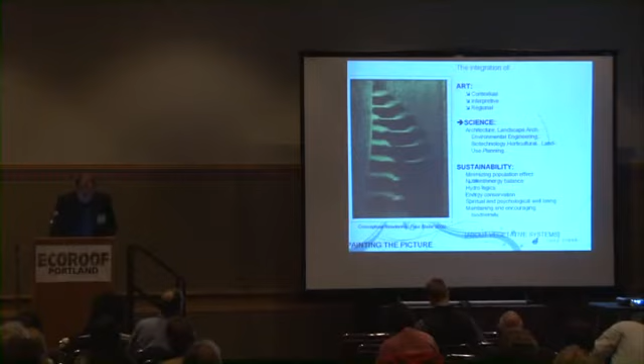I also want to somewhat describe the evolution of this design, this ecological design practice from my perspective in doing this for some 25 years now. And it is an integration of art and science and sustainability with that true emphasis on the philosophical connection we have and that spiritual connection we have to nature. And I'm thinking about where that green staircase will lead.

I had my start as an artist and ecologist in Big Sur, where Mickey Muenig came to me, and he had one of the first low-impact development projects on the coast where he said, we're not going to build roads, we're going to respect the local hydrology and that mantle of soil and earth, and built his bungalows and hotel units in the redwoods without cutting down a tree, and lifted them up off the ground plane.

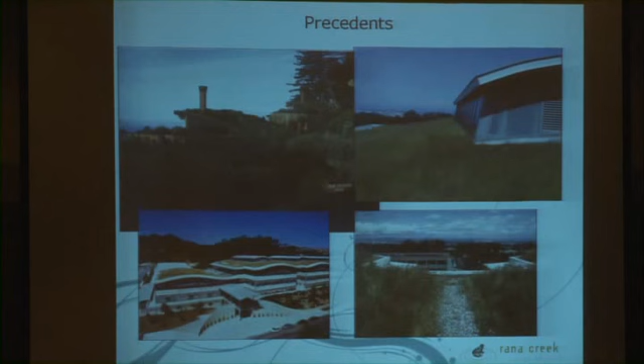And then on the coastal bluff, I was studying the coastal terrace prairie, some 250 species of vascular plants. And I was concerned, and I said, Mickey, you know, I'm worried about this. I've been studying the diversity and the rarity of coastal prairies. And Mickey looked at me and said, well, why don't we just lift that up and put it on top of the roof, and it'll be as a part of the site. And we did that, and that was 25 years ago.

And then sometime later, Bill McDonough came to me and said, Paul, I have a project, and I consider this a courageous project. Of course, at that time, the North American movement in terms of greening rooftops hadn't even caught on, and we didn't have those kind of metrics, and we didn't have a whole lot of information. Most of these rooftops were in the form of on-podium or plaza applications, and they hadn't fared too well, namely the Kaiser Center or the Union Station, both of which failed.

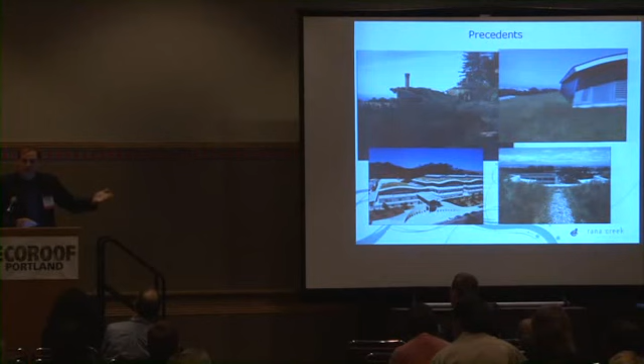And Bill said, I want to develop a landscape, or I want to bring that ground plane up on top of the roof. And I was doing restoration ecology on San Bruno Mountain and thinking about those McHargian type environmental factors of slope and aspect and orientation and wind speed and solar gain, and thinking about how that affects soils and other geophysical applications of the science of restoration ecology.

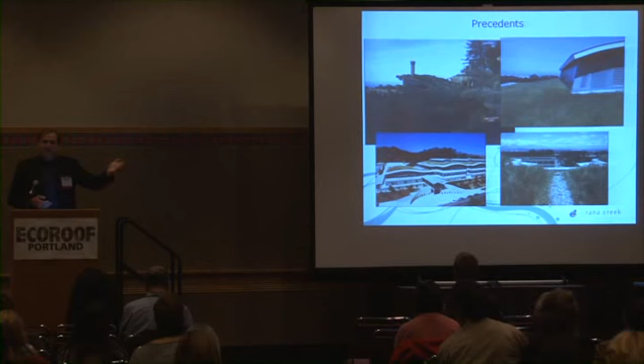And I wanted to model or mimic or simulate the composition and diversity and density of plant community structure. So I was thinking about restoration ecology on rooftops, and Bill's rooftops with those beautiful undulating swales gave me an opportunity to look at south-facing species and ephemeral annuals on the south slopes, and those cooler sides and swales with wet-loving and cool species.

And that was how we modeled this rooftop. And we also developed this idea of a bioswale some 3 stories above the ground plane. Now this is what's interesting.

We developed that bioswale with Juncus patens and Carex texensis and other wet-loving plants, and it would clean and polish and filter that toxic, poisonous, chemically volatile material out of the air, and purify and cleanse and adsorb water and moisture. And then we took that water and we took it right to the stormwater leader and right out to the storm drain. Well, we'd never considered doing that today.

And so in my discussion today, I want to share with you some of the ideas and the importance now that water has in terms of this integrative design process.

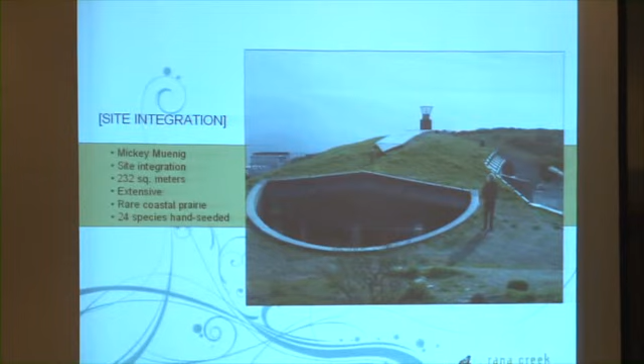And another theme that Mickey had mentored me about was site integration, this idea of respecting the natural contours and the hydrological features of a site and match lining the structure or the site or the roads or the conveyances to that natural topography. And I said, Mickey, I'm working on this criteria for architects in which I can help them understand ecological design principles of site applications for site integration, site and structure.

And I said, how do you do it? And he had that twinkle in his eye and he said, intuition. So it's not only about thinking here with our minds, but also thinking here with our hearts that we can achieve some of the greatest results.

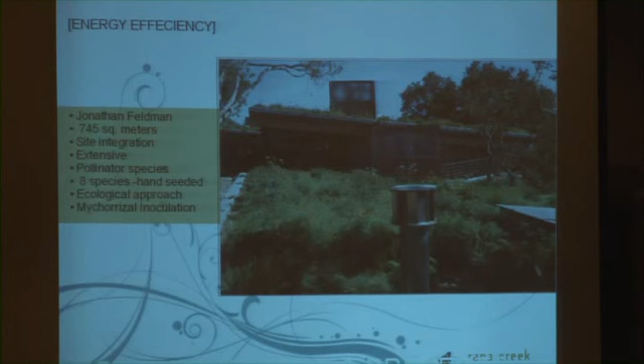And this little project that we had done for a house in the Santa Lucias, 175, 190 days without rainfall, extreme temperature variation there in the Carmel Valley and the Carmel Highlands. And we integrated this with passive ventilation, and at the base of that house is a constructed wetland with gray water. And there are vents that are hooked to a heat chimney on the hot side of the house.

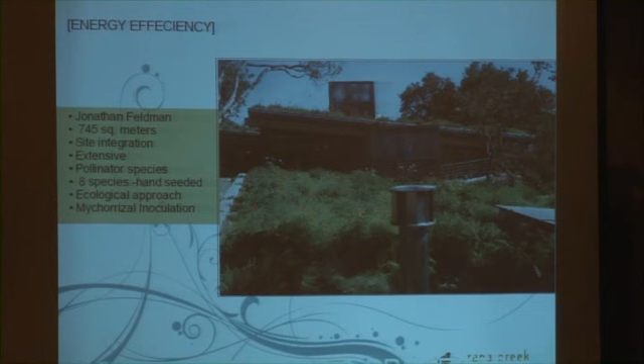And that pulls that cool air over the surface of the gray water wetland through the plenums in the floor plates and exhausts that air out the top. And then the rooftop is insulating, and they elected not to use any air conditioning here in this house. So it's been very successful from an energy conservation standpoint. And then we also selected and collected all the species for this project from the site.

And then this project really started my continuous debate and conflict and tussle with landscape architecture about amenity and adornment, that continual struggle between form and function. And I worked with Pete Walker, and Pete and I still have a spirited dialogue in regard to the application of landscape architecture and the ecological processes inherent.

And Pete said, Paul, I've got this parking structure outside of the Stanford Medical Center, and I want you to develop a plant that is 10 inches high, is evergreen, never needs to be maintained, you don't have to water it, and it looks visually like one solid continuous panel. I said, well, why don't you use AstroTurf?

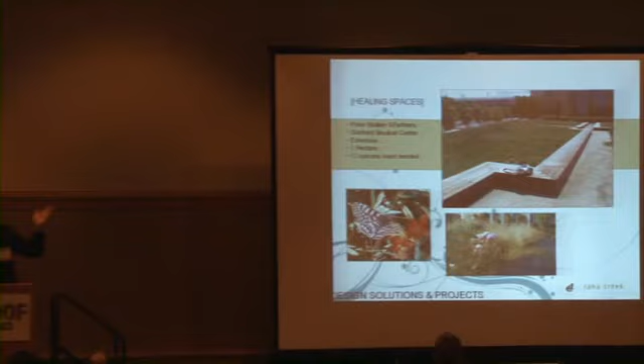Well, this began my understanding of this Harvard School of Design, in which we're looking at the site from an artistic standpoint, this texture and color and panel and the idea of palettes. Well, I paint with a palette and I assemble plants in cooperative assemblages.

And knowing that in ecological practice, where our systems have greater diversity, they have more stability. They're resilient to invasion by parasitic organisms and also to climatic fluctuations and change. So I went along with Pete's idea, and I put that green haze out there on the landscape.

And I also said, Pete, wouldn't it be interesting just to experiment and put a few little sprinkles of wildflowers for the patients that look down on this rooftop? And he said, okay. So I kind of affectionately call this the eco-hijack because I actually used 26 species of plants and about 60 pounds of seed and planted it with a suite of plants that were early and late pollinating plants for rare species of butterflies and insects.

And I just visited this site, and the other concept we got through here was this idea of decadence, dormancy, senescence, and decay. Oh my! You would think, with these ideas in sustainability, that, oh, we have brown roofs where they're dying. Well, that part of nature is also important.

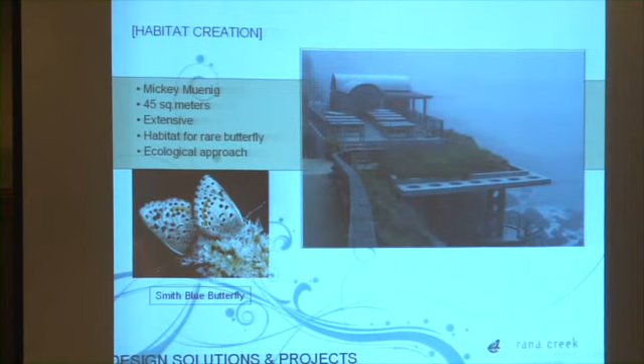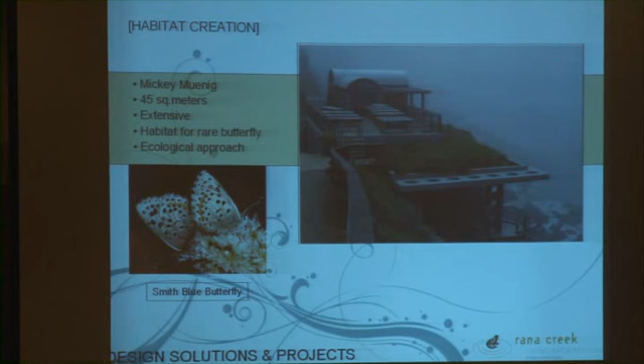And then this little project is really a fascinating project to me in that as a land use planner, I call that the dark side. Having done ecological restoration as part of a reconciliatory mitigation process, I was able to convince the U.S. Fish and Wildlife Service to use the rooftop as part of the mitigation for the site. Never been done. Typically when we mitigate off-site, we find intact habitat, or we find set aside, or we actually do ecological restoration to enhance habitat for, in this case, the Smith's blue butterfly, which is dependent in its larval state on the Eriogonum parvifolium, the cliff buckwheat.

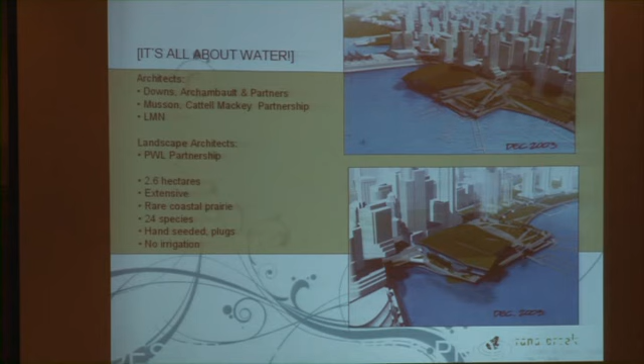And so we planted cliff buckwheat on the roof, and now you might think that my life as an ecologist is easy, but I have to sit in that hot tub with field glasses and monitor for those butterflies. And they get larger in scale, and I can't wait to get up every morning because of the industry and where it's going and the kinds of projects we're seeing.

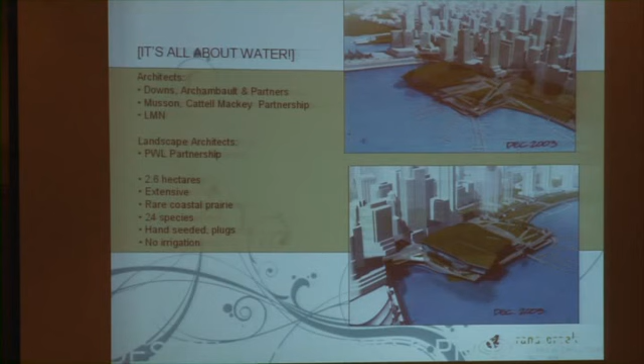The Vancouver Convention Center, I remember walking into the room, there were about 30 people, and there was the model, and I just said, this project is all about water. And truly, we developed a wonderful project here with LMN and PWL Partnership, landscape architects, and we planted some 24 species of grassland ecology and forbs and pollinating species, and allowed for seasonality and high levels of diversity.

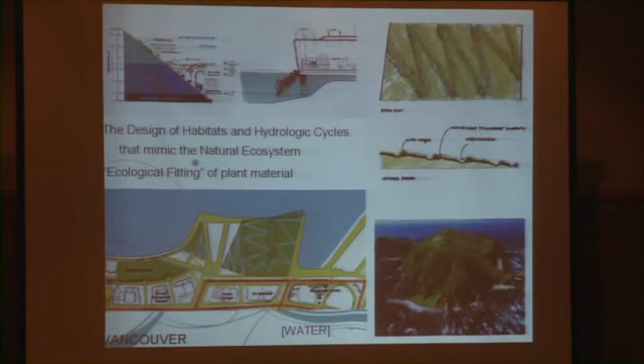And those key lines were engineered by slope and aspect and roof orientation to look at the runoff coefficients in those particular segments, and they are sized only to handle that amount of water as the folds went down the roof. And interestingly enough, function informed form, and the landscape architects took that idea and they seeded part of those angles and they planted other parts, and it's created visually a very interesting functioning landscape. And I was just there, and it's really a pleasure to go back and see these projects.

And I went on a tour and I looked in the basement, and part of our big idea was integration of water. Stormwater we lost early on with the sustainable ideas, but wastewater we hung on to. And there are biodigesters in the basement of the convention center, and the day I was there were 11,000 visitors watering the roof, and all the wastewater is filtered, and the digesters digest the solids, and that goes into processing and storage in two 20,000-gallon tanks, and that irrigates the roof throughout the entire summer. And it keeps it lush and green and vibrant and flowering.

There's bees up there. But it also is reused to reflush toilets. Well, I learned something there that made me happy. All of the energy they're saving through evapotranspiration and cooling on the rooftop has now paid for the entire blackwater system and its operations, maintenance, and upkeep. So it's time to celebrate, because we're taking these integrated sustainable measures and we're getting an ROI. We're actually getting some return on our investment, and that's when the incentive is there. So a great project, good people.

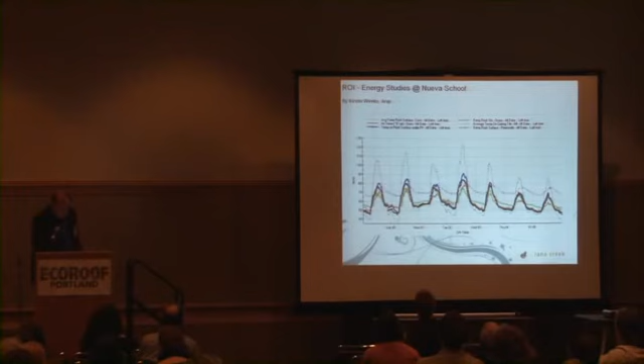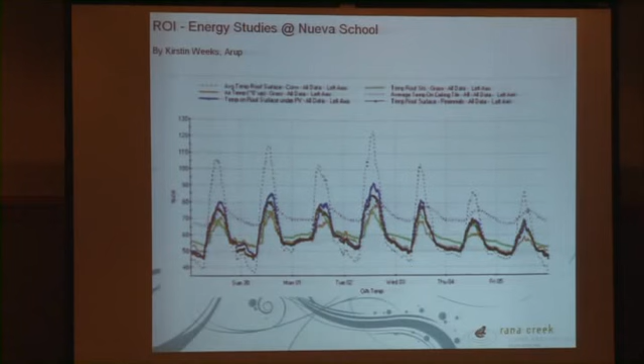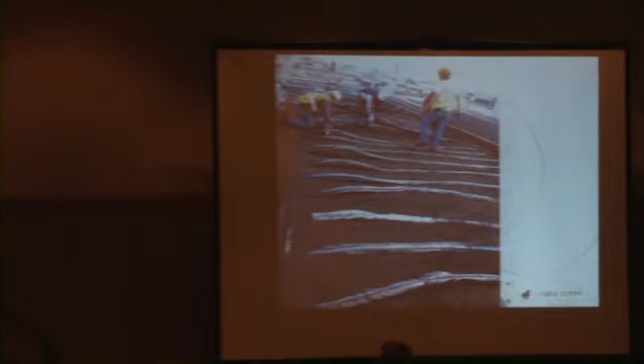And then a local project, this was just taken 2 days ago, on the Drew School, and that's our crew installing this. And this is an interesting project and somewhat of another one of those tussles that we get into, and that has a Patrick Blanc wall. And I had said, well, why don't we take the parapets and the rooftop and just blow out the parapet and not have any area drains on the roof, and like Scarpa would, we'll run all the water right off the roof and over the wall and into a stormwater flow-through planter wetland system at the base of Patrick's wall, into a tank in the sidewalk, and then closed loop prior to overflowing to the storm drain.

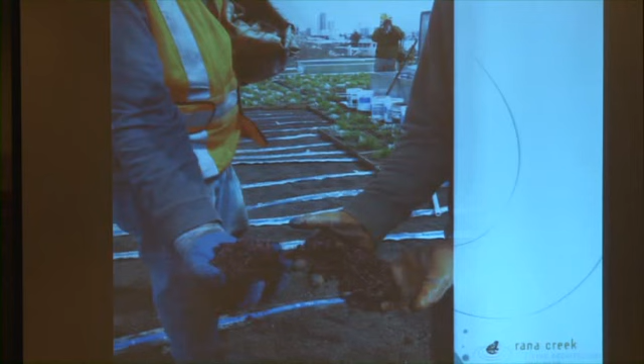Now, these walls that Patrick makes are beautiful, but they also are hydroponic, and that's an example of the rooftop. But I wanted to show you also, and I'll get into this story a little more, we're encouraging greater levels of organic material in our soils, and also this was one of the first specifications where we actually put earthworms up on top of the roof. But Patrick's walls are absolutely gorgeous. He's a horticultural genius and a wonderful artist. However, these are hydroponic systems. They're based on felt. They're stapled up to a Hardie board, drip tube with a fertigator with nitrates and phosphates.

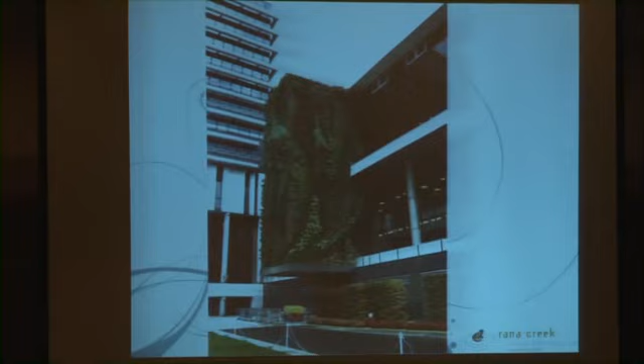And I said to the client, let's think out of the box. Let's take the water off the roof, blow out the parapets, and then take it and collect it. And we got a grant to do that, so that we aren't taking some 4,000 gallons of water a day full of nitrates and phosphates and dumping it into our storm drains. Great. PUC loved it, gave us a grant. I found out after I had signed my contracts to build this that they VE'd out all the recirculation and the storm water. So it was really a big disappointment.

And then I'm thinking, well, the only thing green about this project is Patrick's hair. And I'm getting a little testy, which I sometimes do. I'm starting to beat my chest, and I haven't gotten through it yet, but that's a picture of it.

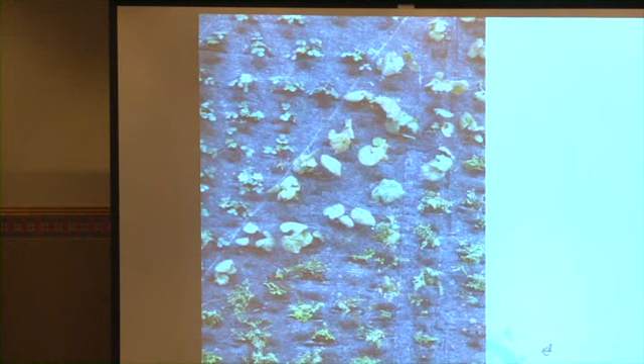Unless these have a recirculation system or some kind of capture and reuse, I wouldn't recommend them. And I'm a little concerned about the viability long term. Here's the growth just after a couple of weeks. And of course, what I call this is a rug on a drug. And so it's hydroponic and nitrates and phosphates. And when you start to add it up, these are some of the projects that Rana Creek has been involved with around our Bay Area.

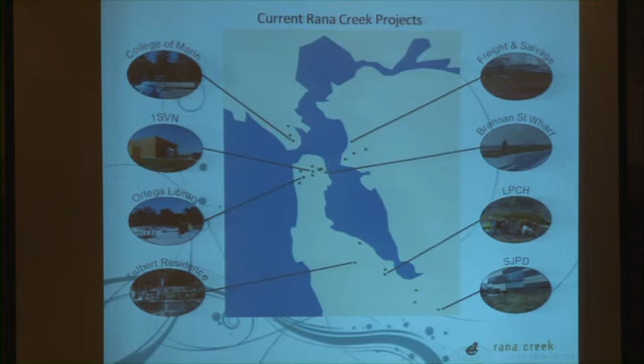We're really starting to get the pattern and connection. I know this pales in comparison to the density that I saw on your map this morning of Portland. Congratulations. But these are just Rana Creek's projects, but I've started to add it up and keep score, and I thought, well, how much rainwater are we actually starting to retain during those storm events, and just our projects is 28 million gallons a year.

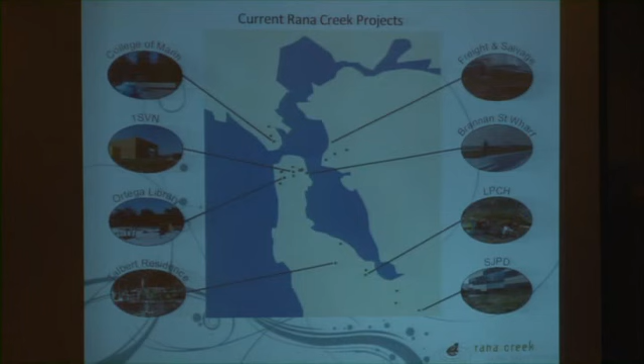And the San Francisco's One South Van Ness project on an old bank building, this is a retrofit, recycled all the insulation and all the old pavers and every bit of the ballast gravel. And we created a habitat there for painted ladies. We took the air conditioning ducts, which are as long as this room and about 6 to 8 feet tall, and did this. We painted the mother painted lady on that structure and then planted the whole surface for painted ladies, and it's a field of dreams. They came. It's a beautiful thing.

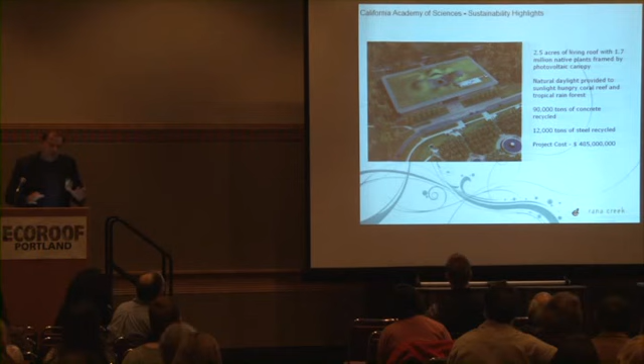But this was our first example of where that penthouse, we captured all the rainwater and stored it on the roof, and then we're gravity feeding that water to irrigate the roof. So a lot of good things happening, and the California Academy of Sciences is another example of when everything fits. 2.5 acre living roof, LEED platinum structure, just a brilliant design team.

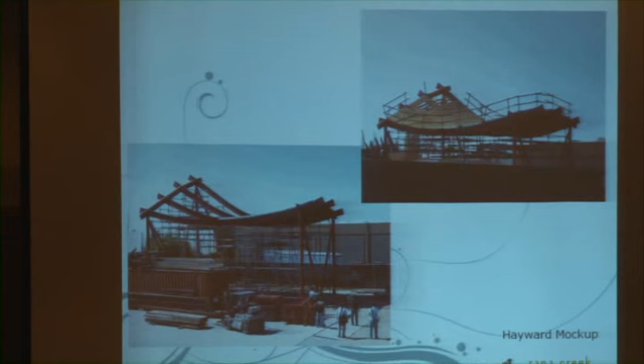And one of the first things we did, and I've often recommended, we did this at the Vancouver and we did it on the Gap, is we build these mock-ups, because oftentimes people ask me to do things that haven't been done before. In this case, they asked me to retain 6 inches of soil on a curvilinear slip plane that's 70 degrees. And I said, yeah, of course I'll do that.

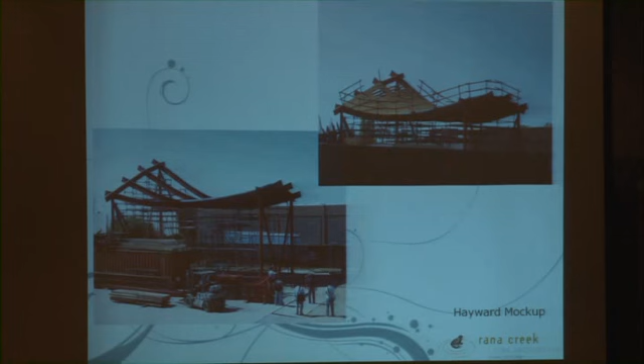And I remember the design team, they got me over at a restaurant and gave me a couple glasses of wine and then started to interview me about whether or not I thought we had the stability of this rooftop figured out. And I was doodling and sketching, and I looked up and I was, we wouldn't have any problems. No, we got this figured out, and this is how we're going to do it. And I look up and they're video recording me. So sometimes you got to have somebody with the target on his back.

But when this started to get real, if you follow the trajectory of that slope, the top of the dome is somewhere up here above the projector screen. That's giving you the idea of scale and mass. And about this time, I started to lay awake at night wondering what I got into. But also you think about how these loads telegraph through the structure, and we put all our drainage systems in a grid pattern over top those beams.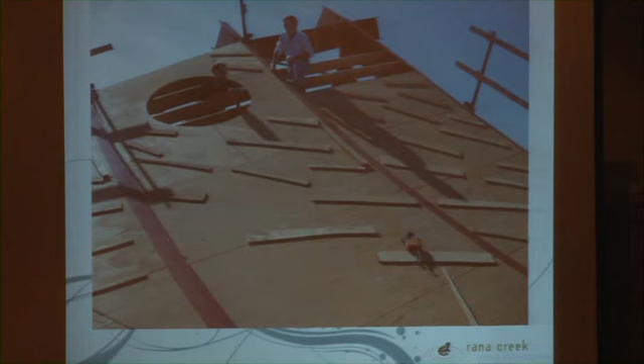And I remember, here's this other tussle story between the form and the function. I had developed this beautiful lacy keyline design on top of the roof, minimalist, just what we needed. And Renzo's team came back with this grid over and atop the domes. And it was because it would mimic the look of the streets of San Francisco as they go over the hills, and I thought, well, how ridiculous.

But as it turned out, that was a really good idea because it gave us an opportunity to randomly stratify the whole roof in 97 cells. And now we have edge effect controlled, and we can do experiments. And really, actually, as Renzo said, Paul, we're just going to provide a canvas that the Academy can paint on.

And this is just part of that, and we began to learn other things when LEED would come into play. Renzo's team and their sense of aesthetic, they like this polished rock that's picked up by Mexican children in Baja off the beach. And so I said, well, why don't we use this old cobbled-up mine waste stuff that's just 100 miles north. And it was a good process because LEED kept us honest and we actually made the right choice.

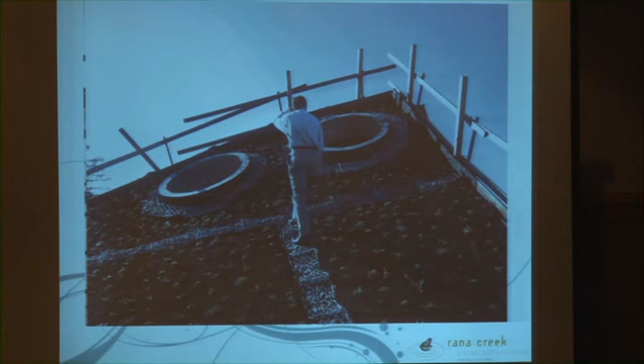And then I was trying to figure out how to retain soil around those skylights, and came up with these gabions and channels, in which case you can imagine over a 5-year period you're losing infiltration, and during big rain events, that sheet flow, you want it to get down to your drain layer and off the roof. Erosion happening, from the bottom of a slope and cutting up.

And I remember Renzo saying, well, Paul, you tell an interesting story, but it has to be beautiful. And I didn't like this very well, so I then came up with what I called the Victoria's Secret solution, the underwire bra. And that retained all the soil there without having those big clunky gabions in the channels.

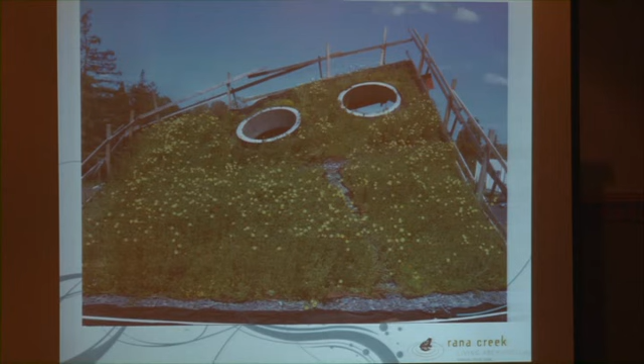So we then planted this with our 4 species of perennials and some 6 species of annuals, targeting pollinating periods throughout the year and biodiversity, and began to hone in on PLS seeding rates, pure live seed, in order to get the right composition. But you know, when we started to implement, we also did another mock-up there in the lower corner, but you can start to see the complexity and the scale and the size of the transitions.

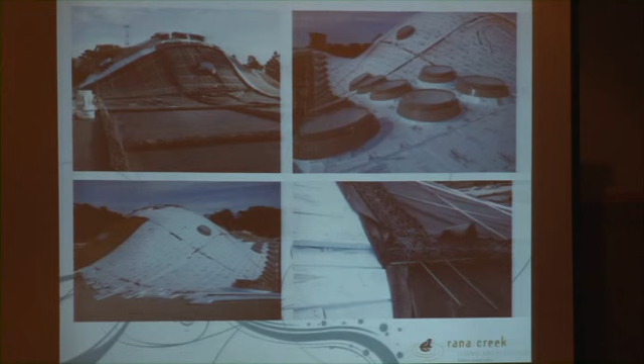And here's another way in which we retain that soil: there's 2 layers of insulation, and the top layer is simply separated, and that gabion basket is sitting on the bottom layer, and there's a lock channel, and then rebar through that, tied by these fabric or fiberglass poly straps and anchored to the other side of the dome. So essentially the weight is cantilevered. If one of those cells were to move, then it would have to drag the weight of the other side over the top. And that was part of the solution.

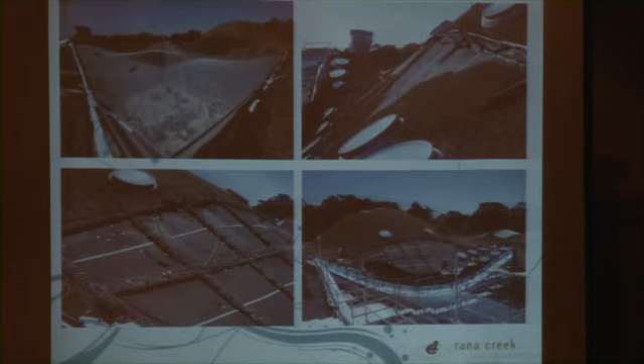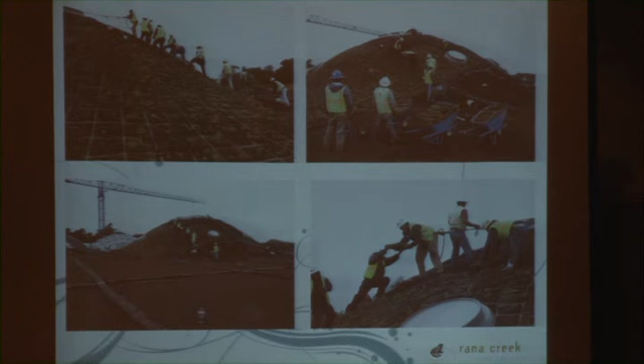And then we began to divide those cells into smaller segments, but I think now you can get an appreciation of the slope and aspect and orientation, and sometimes it rains, you know, 6 to 8 inches overnight or in a 2-day storm event. We haven't had any erosion or problems, and it's fully vegetated. And this was a great effort by Jensen Landscape and how we tiled up these trays.

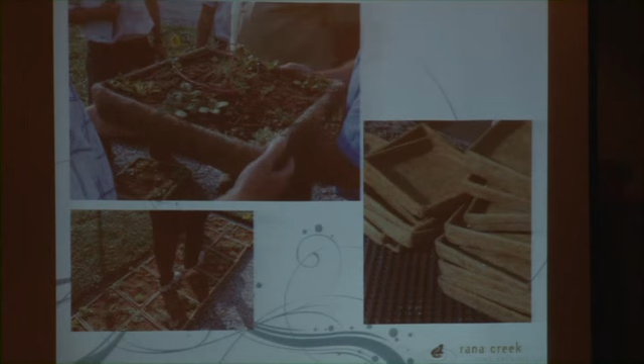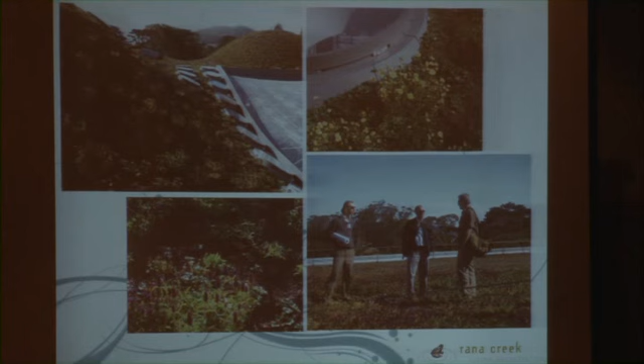And it was really a successful method of getting soil and plants pre-grown on top of the roof in an economical way, and it turned out really nice in that the trays did what they were supposed to do. They biodegraded and left behind some carbon and organic matter, but now it's seamless and you don't see them anymore, and the flowers have emerged, and that's just the way in which we planted. But the whole roof evolved, and now we've applied that technology elsewhere.

And so where from here? Those are built examples, but now bringing you fast forward into the future to large-scale design opportunities where we're pushing that envelope and bubble on integrated water management and design as part of the structure. And we're reaching for these objectives, in that we're not going to use potable water for irrigation. And that's particularly important in the Bay Area, where we have some estimates of 60% increase in water costs over the next 5 years. And we're not going to use potable water for non-potable applications.

Why are we taking drinking water and using it to flush our toilets? I'll never know, especially in the deserts. And no groundwater and stormwater discharge. I think we're there. We're getting there through regulation, the Clean Water Act, and we're getting there through LEED with site credits. Treat wastewater and stormwater as part of an integrated system and as part of structure.

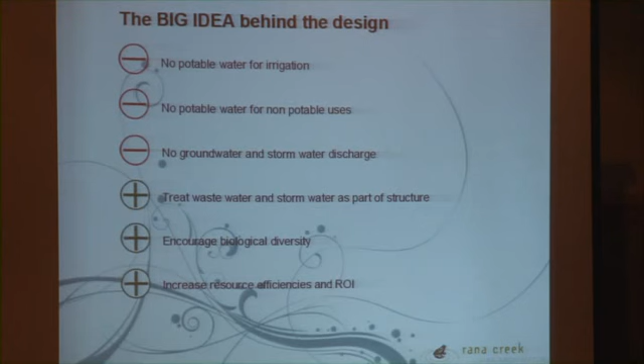That's like science fiction. You know, a few projects we're getting there, and architects and clients look at us like we're sometimes loonies, but that's okay. We are. And encourage biodiversity. And finally, this most important topic: never tell a developer you'll save the world. Tell him you'll increase his bottom line and save the world, and we're getting there.

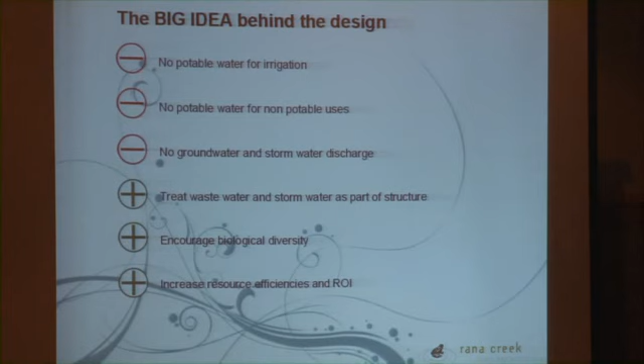We've got now a gray water calculator. We just did a project for Ford on reuse, 250 homes, 45 of those homes providing all the water for all the irrigation they can possibly use in landscapes, and it pays for itself in 3 years. So that's where we've got to get to.

And when we start stacking those applications together, what the permaculturists called stacking functions, or this idea of multi-functionality, I want to highlight some of those things in these 4 projects today and give you an indication of the trends and issues, resilience and integrated project delivery in water, choosing by advantage.

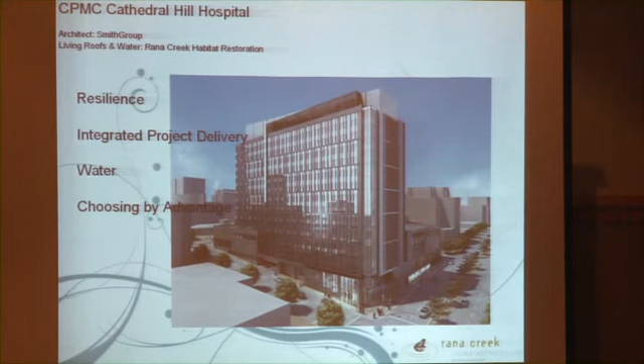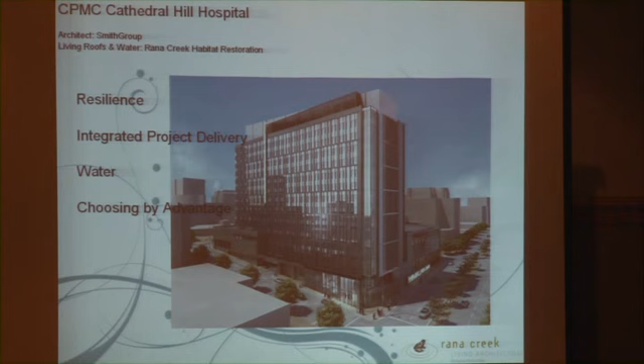This is a $1.7 billion hospital built at the location of the Jack Tar Hotel in Geary and Franklin, a really urban place. This was where Francis Ford Coppola wrote one of his first screenplays called The Conversation, for all of you trivia buffs out there. But we also went through this integrated project delivery, and we developed 7 rooftop gardens that are fed by gravity and that end up in a collection basin or a tank below the structure.

And we then began to think about this big gap we have. We have all this demand in the summer for water, and then we have 0 storm water. So we need to fill that gap with waste streams. And I said, how much water is the cooling tower blowing off? And it was 12 million gallons. So great, give it all to me. I'll take it all. We'll commingle it with our storm water, and we'll use that all throughout the summer. And it just got us to about 50% potable water usage that we could decrease. And then we increased our real estate and tank size, and we got to 100%.

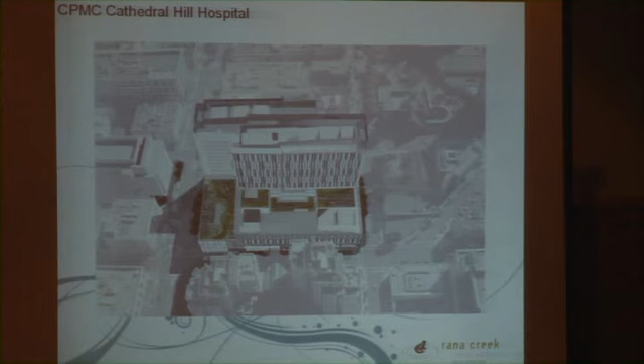But that's kind of the idea there for the hospital, and looking down on this side of the structure, there's the connection, and some 5,000 visitor patients will have access either visually or physically to these rooftops. And these are modeled after ephemeral ecologies.

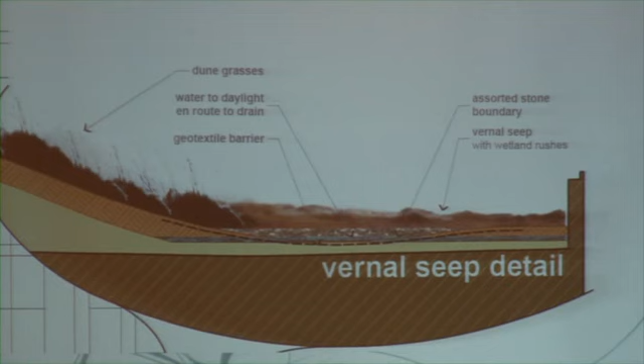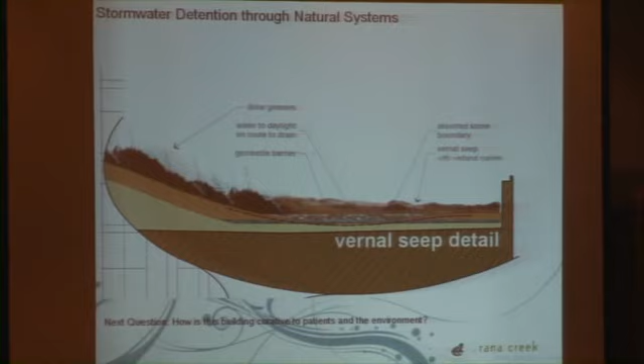I first saw this done on cobble substrate in Switzerland and applied this to our western landscape ecologies and actually changed the composition and the basins with higher levels of particulates and finer particulates and clay, dolomite, so that we can actually retain water and spill that water and get that mound, intermound, basin effect of shrinking and growing water bodies, so that we can encourage these kinds of species. The butterflies require that kind of a mud surface for triggering reproduction in the springtime.

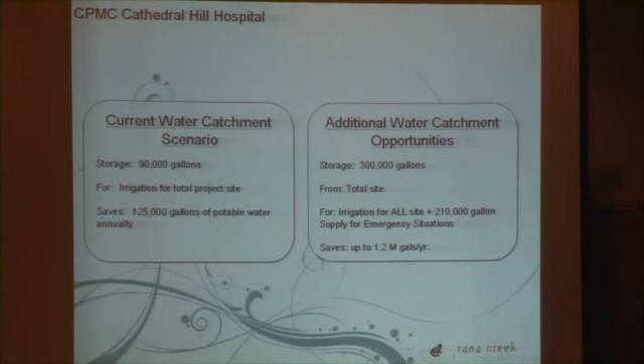And the water story is interesting in that we've, by advantage, chosen this additional water catchment with all of the storm water and all of the cooling tower water. It's going to save about 1.2 million gallons a year. And it's really about resiliency, about a 3 to 5 day water security for the hospital, thinking that the Bay Area, San Francisco's water supply is 187 miles in a single pipe to the Hetch Hetchy Reservoir in earthquake country.

That's the other thing. We always talk about the warm, fuzzy stuff, but we really need to take the gloves off and think about survivability in our cities in times of catastrophic events, and I think we're beginning to see the acceleration of those events globally.

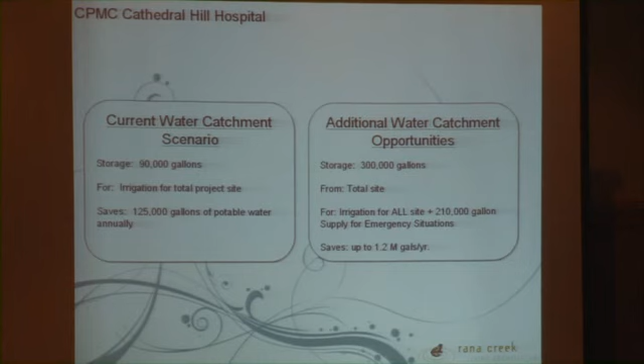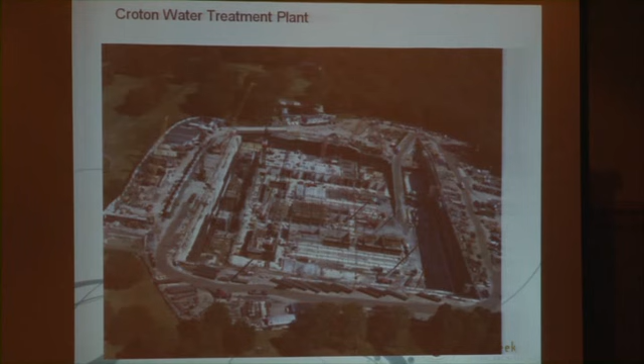And here's another interesting project that is a bigger scale, just to kind of tweak your imagination. 9 acres on deck, and this is for the Croton water treatment plant. It delivers 50% of the drinking water of Manhattan, and it's submerged 3.5 stories deep. And when they had excavated, they found 4 artesian wells that are producing about 50 gallons a minute, and it has chromium in the water, which is a hazard.

And so we decided to take that back up in this crescent-shaped constructed wetland, and all the entrained water that's going through the golf course and the driving range goes back into the wetland. All the storm water goes into the wetland, and all this pumped water out of the subfloor goes back into the wetland.

And while these concepts at this elevation appear simplistic, the brain damage we went through over spreadsheets on residency time and calculating the square area and the variance in flow and source models to come up with the size and the type and typology of the wetlands was challenging.

And zero runoff, so all of this water then is entrained and reused. Now you'd think that would be a challenge, but the biggest challenge when I talked to the golf course, now remember, the homeland security issue, people flying over this are going to see not the water supply of New York City, but they're going to see just a driving range and a golf course that's seamlessly integrated into the golf course of Van Cortlandt Park.

And then any of the public that are in the park and doing their golf and recreating, they can't get onto the roof to the plenums because of this moat. But that's the big idea there, and again, that biggest challenge was I got the list of the cultural practices from the golf club, and they had 26 different types of chemical, inorganic herbicides and pesticides that they use as a part of the management of the golf course.

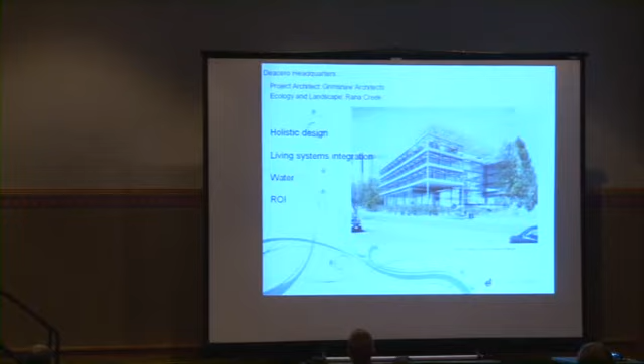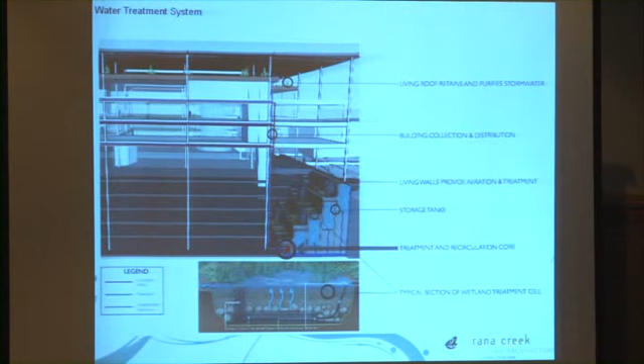And it's funny the kind of things that occur in the design process. And this project I absolutely am thrilled with. And I could talk about projects from now until midnight because it's so fun to be engaged with great architects. And this was really about holistic design. We had no barriers in terms of water. And so we took storm water off the roof and gravity fed that into the atrium. This is being built now. All these projects are being built.

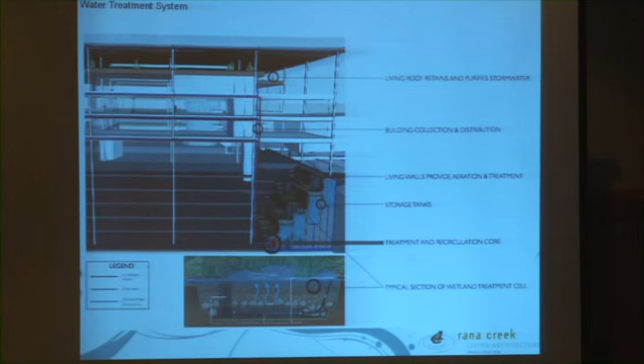And again, we're thinking about, there's a car culture, Monterrey, Mexico, DeAcero headquarters. Everybody has their own car. Everybody drives their own car. 5,000 cars come to work. So they developed this big parking structure below grade, and I said, well, why don't we put the constructed wetlands to where we can use passive ventilation coming off the rooftop through the atrium, which is, you know, a big

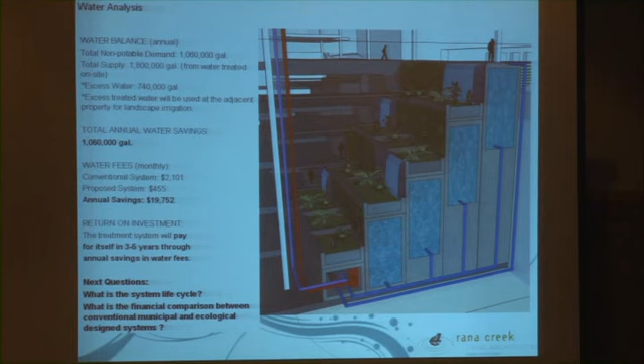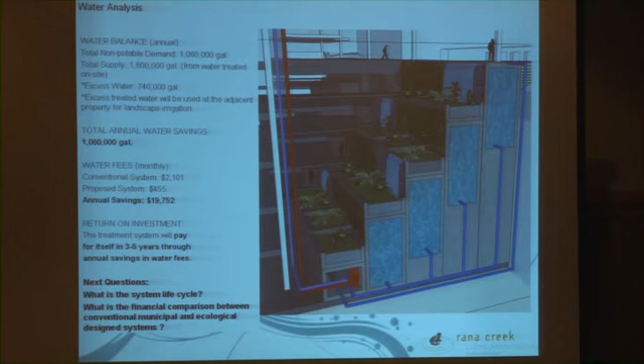But with the combination of the black water treatment, the gray water treatment, and the storm water, we were able to do some really cool things. We have 740,000 gallons of water a year that we can't even use. That's being exported off the site and given to the city to grow park trees along the causeway because they have no water. And it saved us about 1 million gallons. And I know these are small numbers, but they're important numbers. And it saved about $20,000 a year. And it pays for itself in 3 to 5. So again, we're starting to get there.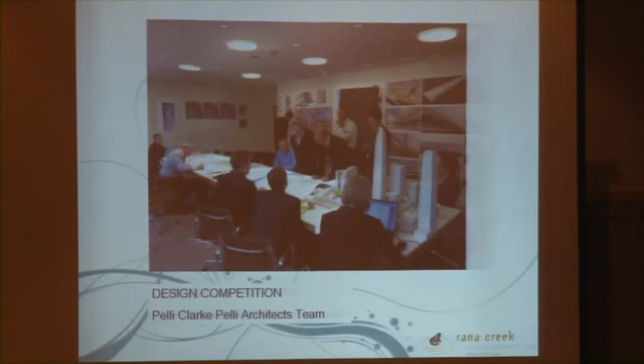And I'll talk about one more project in design that is really fascinating, a 6.5 acre park downtown San Francisco. And this is really about policy shift and change in that the first design charrette, that's me in the background not paying attention, we were thinking about the big ideas for the project, and that tower was in the scheme at the time, and I was thinking, well, what's the capacity of the park as a metabolic organism that cleans and physically, mechanically, and biologically processes water and waste?

And then I drew this little cartoon about the water processing, thinking that we could take that water and process it through the living walls. And it's interesting how this is what Renzo taught me about these little abstractions and cartoons. They're so informative that we could take water and bring it through the living walls and bring air with that water and kind of bubble it up through the constructed wetlands.

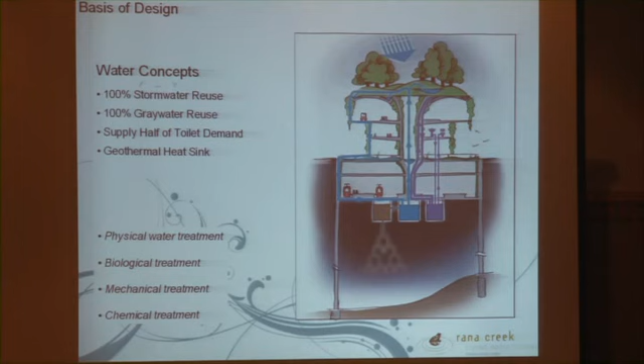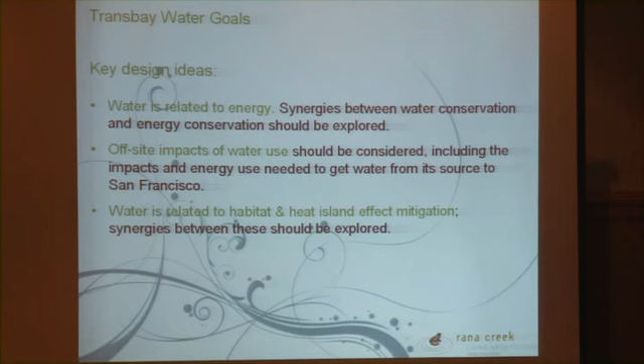Well, we're getting there. The design ideas are linking water to energy, and we're also looking at the off-site impacts, and so now we're bringing stormwater from all around the building. LEED looks at the site and at the structure internally. We kind of said, okay, well, what's out of the box? So can we take water, stormwater and wastewater for other locations and treat it? And then it's also important for habitat, and that's been our designs.

And working with Pete, he's come up with a somewhat complex scheme with a lot of program, and I'm glad that he's there because he really fought the good fight with keeping this park a park. You can imagine the municipalities saying, well, if I open a coffee shop, we'll have revenue. And, oh, I want a basketball court and yoga pavilion and amphitheater and 6.5 acres later, we've got a strip of lawn and maybe a couple of flowers.

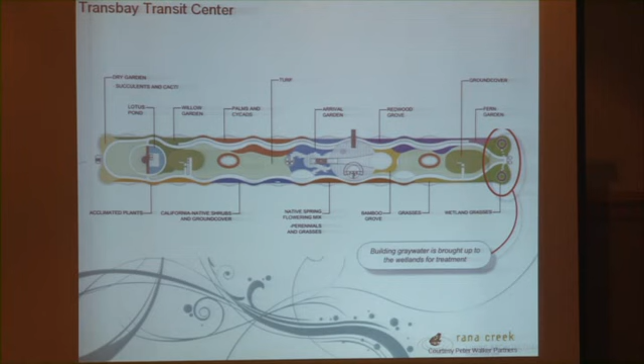That's not the case. We really achieved great things in that first time in North America, we put this large-scale gray water processing on top of the structure. So all of this water is featured and it's flushing the toilets and it's gray water cells. The water's entrained and it's subsurface, which meets our code. It was a real challenge with code, and this is the vision, big basket columns and 6 feet of growing media.

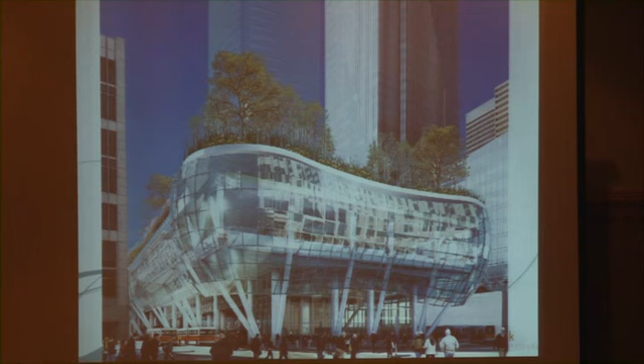So mature, I can envision that, that's Pete's vision on the green side and Rana Creek's vision on the brown side. But notice the importance we put on certain occupants, not the crack dealer, but the importance on certain species is a part of the vision, and that's the constructed wetland for gray water. And I can see we're going to have canopy forest because of 6 feet of growing media, but that's between 2 decks, and there's a lateral cell that's quite extensive for lateral root growth and development. And we've modeled the life cycle weight of this, and those basket columns are going to hold it up.

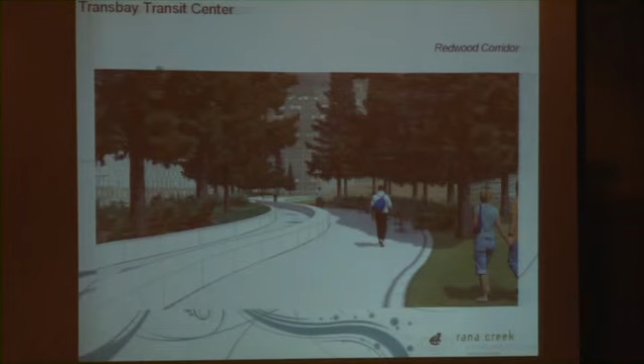And these are the species right downtown. I was seen lately running downtown San Francisco chasing 2 dragonflies to see where they went. And sure enough, they went right down the storm grate and found a little breeding ground. And then the scorecard looks like this. Our water savings is equal to about 9.5 million gallons, or what is that, 115 residential homes. And then the numbers are starting to look pretty good, but on a structure like this, it's pretty tough.

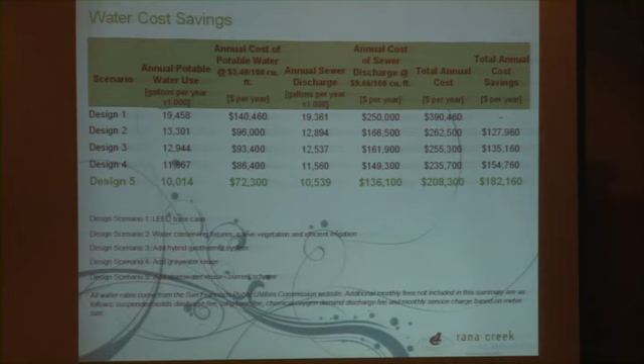Policy achievements, we actually got a variance with the PUC, the building department, and the State Water Resources Board on the gray water. And that was not necessarily the only part of the green features. So this is an aggressive, ambitious project with natural daylighting and semi-conditioned space, and really a great opportunity to be a part of this.

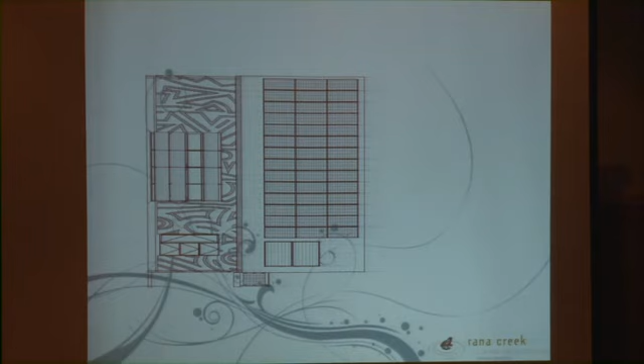But that's the garage on this interesting project, and it's the test for a living wall system, an art system that's in Three Rivers, which is at the base of the Sequoias, 8-inch rainfall, lots of 120-degree days, and that's the kind of growth we've had with 15 different species of plants. It's soil-based, and I want to go back here because I've lost one of the images.

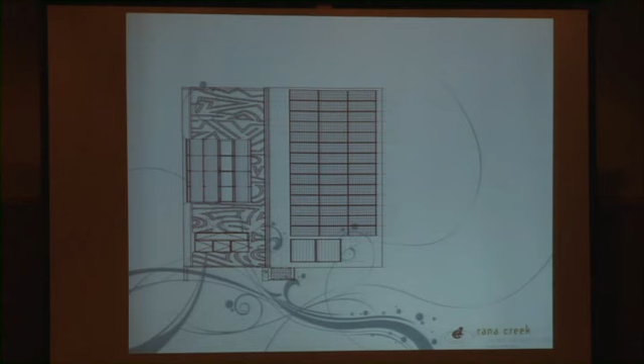I wanted to say that it's an estate home, but it's the laundry for all the different homes, and so we're taking all the laundry gray water and integrating that with the stormwater, and zero potable water is used in a fairly desert, arid climate for this living wall. It is soil-based, and it's based on the use of reclaimed water, and that was just our first little mock-up. And this idea of art, we can take this abstraction and think about its application to landscape and design.

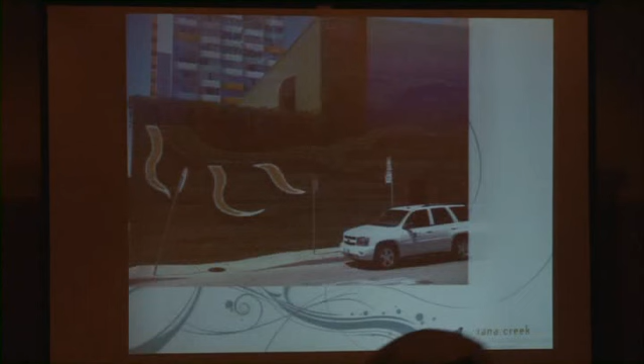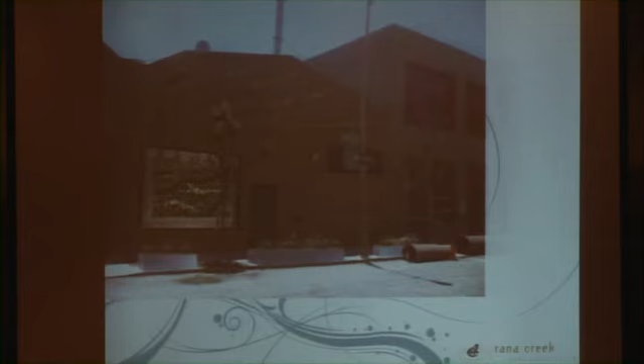I think that's where the spirit of our work really comes from, is this integration of art and ecology, engineering. And this piece I've just been commissioned to do really incorporates metal sculpture and color. It's on a gallery, and then thinking about, well, why not just frame the pictures and start putting living walls in pictures? And the last scheme looks something like this, focusing on ecology and different species.

So that's kind of where we are. I feel like we've just taken off. It's an exciting time for us all. We've got a great history of working together throughout the world, great networks of people, good organization, terrific products. Policy is moving forward, and I couldn't be more optimistic.

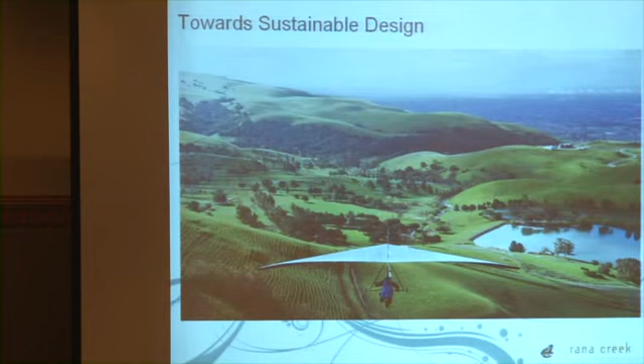If there's any that need to be asked. Out there? Does anyone have a question for Paul? No? Yeah.

I like the coconut boxes that you had on that rooftop. Are those available for the general public? I'll tell you what, they are available, and Tremco is a large roofing manufacturing company, and they just bought that patent, and I'm working with them to do the BioTray 2, which is made out of hemp. And so hang on, this coconut is a great idea, and it supports some of the forest farmers in the world. It's organic coconut, but hang on tight because we're going to introduce some organic, local materials. But you can call me or Tremco, and we can give you information about it.

And the last and final question for me is, at the very beginning of this lecture, you mentioned a Kaiser building and a Union Station that failed. Could you very briefly say why it failed and how we as homeowners or whoever doing Ecoroof can prevent the same mistake? Both of those projects, you've heard of Ted Osmundson, a great founder of green roof design. He wrote the book in the 70s, and he was just honored with a Lifetime Achievement Award. Wonderful designer, but at the time we didn't have